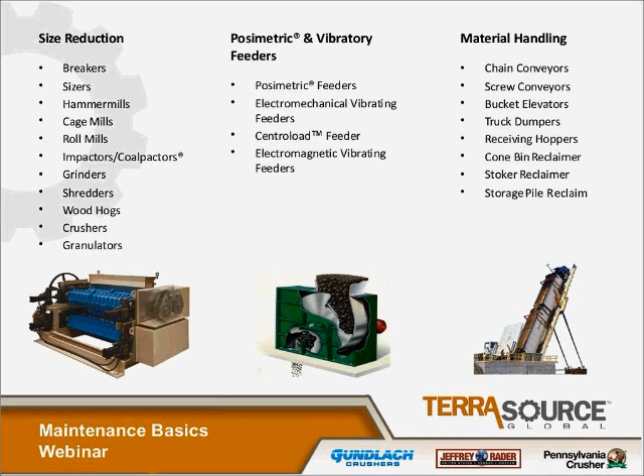The Gundlach crushers, obviously the roll crusher comes in several configurations, 2-roll and 4-roll. Nanosiz-Rs for fine grinding, cage mills, and high tonnage breakers.

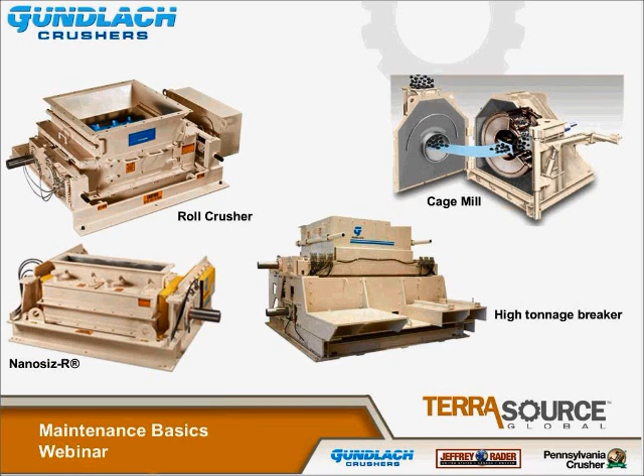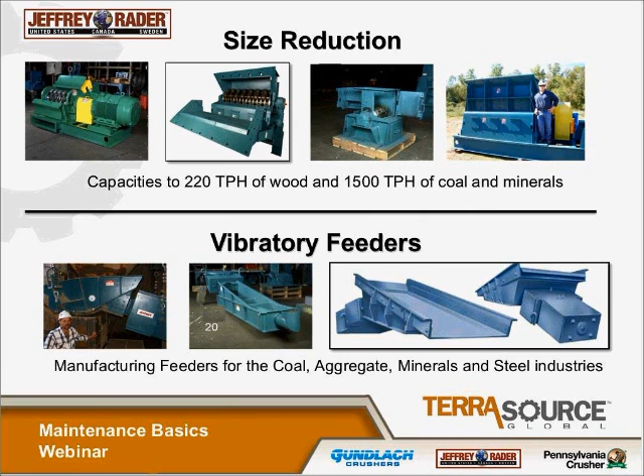The Jeffrey Rader size reduction equipment comes in many models for processing the various materials and industries. Our vibratory feeders are used throughout coal, aggregate, mineral, and steel industries, and other numerous alternate areas.

The Jeffrey Rader pneumatics are a dilute phase type of pneumatic system for conveying biomass, MSW, which is municipal solid waste, RDF, which is refuse-derived fuels, and sludge handling.

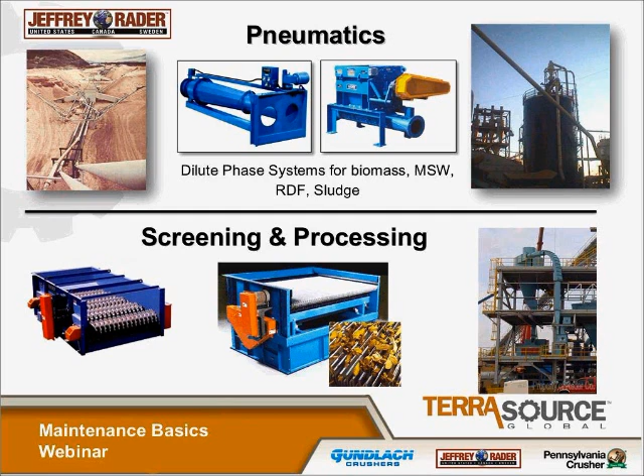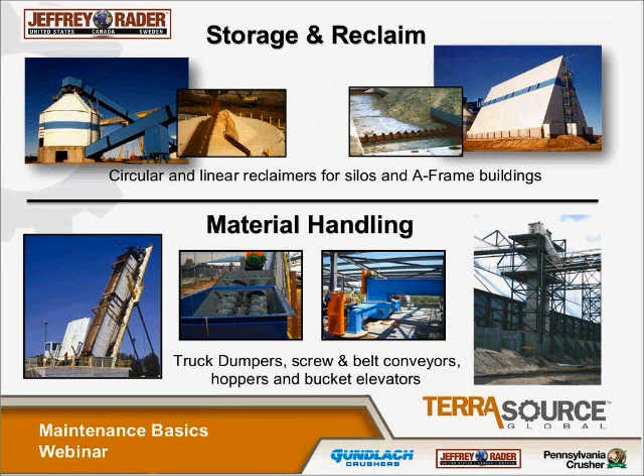Screening and processing lines of equipment for classifying numerous types of products. Storage and reclaim systems, very many numerous designs, and the material handling from truck dumpers to screw and belt conveyors, hoppers, and bucket elevators. So it's a very diverse product line offering.

In the Pennsylvania Crusher line, we have the Mountaineer Sizer that's used mainly at the mine mouths for coal and some of the limestones. We have the Coalpactors for impacting and breaking the coal at the power plants into finer, like quarter-inch sized coals for being fed to the boilers, posimetric feeders, and Bradford breakers.

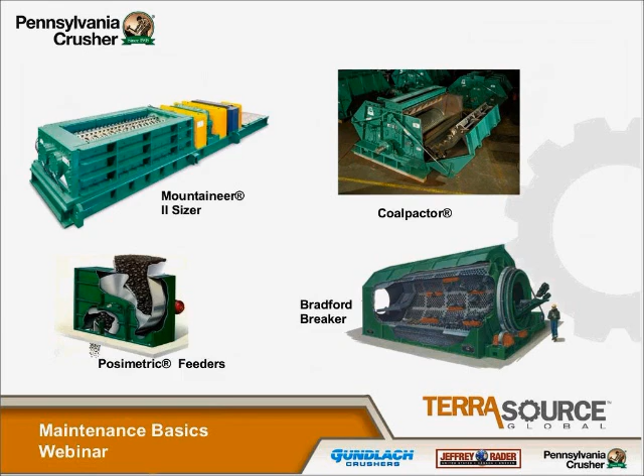These show some of the units. Some of these Pennsylvania Crushers are quite massive, as shown in this single roll crusher. The jaw crusher is a primary crusher used for glass and cullet and limestone and coals. Also the granulators for fine grinding and the reversible impactors.

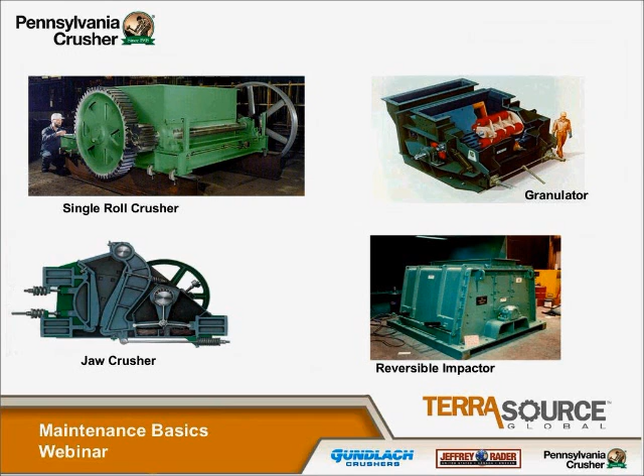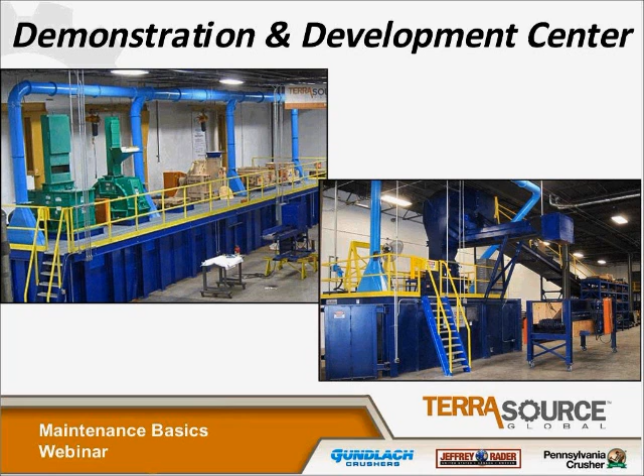TerraSource, to consolidate, we have closed the 3 specific brand labs: the Gundlach Lab in Belleville, the Jeffrey Lab in Woodruff, South Carolina, and the Pennsylvania Crusher Lab in Broomall, PA. We have moved all 3 of those test labs and consolidated into one new, very impressive, large test lab that is located in Duncan, South Carolina. This is just a couple of the shots showing the installation of the various Gundlach, Pennsylvania Crusher, and Jeffrey crushing and conveying equipment. At this point in time, I'm going to turn the presentation over to Matt Brown.

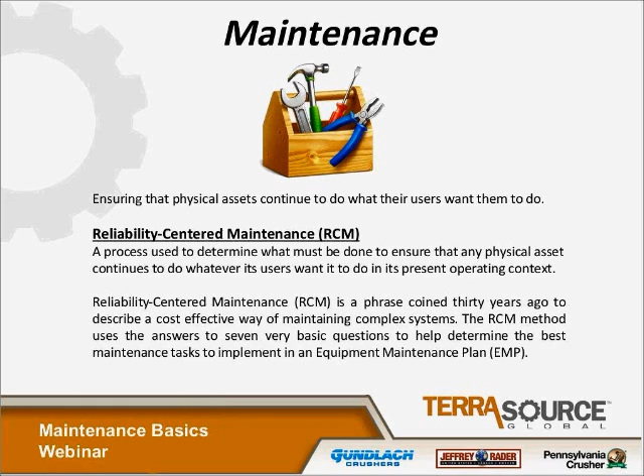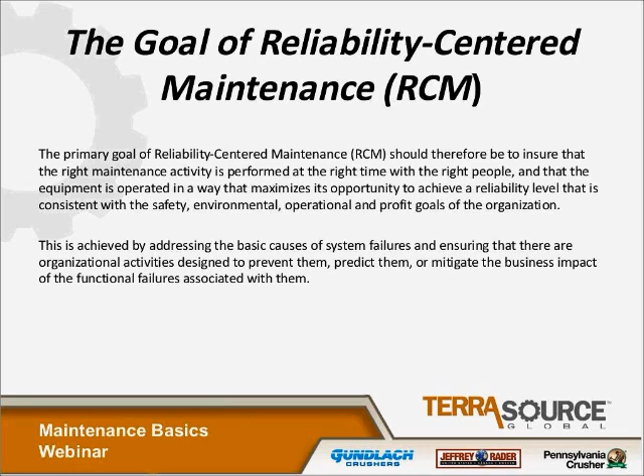Thanks, Keith. The reliability-centered maintenance is the maintenance that was phrased 30 years ago, but it's determined the best maintenance task to implement in your maintenance plan. The goals of the RCM is to ensure that the right maintenance activity is performed at the right time and with the right people. The 7 questions of the RCM are as follows: the functions,

fail to fulfill its functions, what causes the failure, when the failures occur, the consequences, predict of the failure, and the proactive task cannot be found.

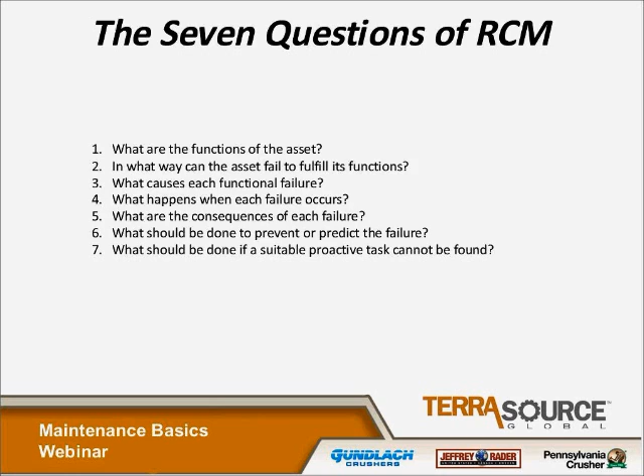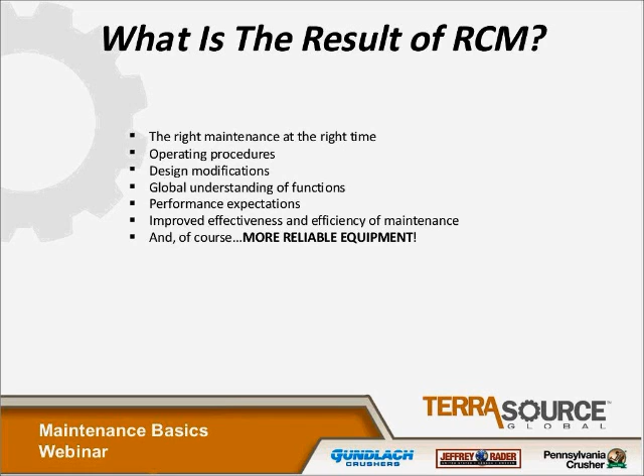Who answers these questions? The RCM team may include the supervisor, planner, craftsman, operator, engineer, manager, or facilitator. What is the result? The right maintenance at the right time, operating procedures, design modifications, expectations, and of course, more reliable equipment. That's the goal of everyone.

Scheduled restoration tasks are when you want to work on your equipment on your own schedule. So if you have an outage coming once or twice a year, you take that time to restore your equipment. It's possible most items survive to that age, and tasks are carried out to restore the original resistance.

Proactive tasks deal with the age of the items, and these tasks are routine items. Default actions are failure finding, redesigning, and run to failure. These are actions that you can't necessarily control.

What is planning and scheduling? Planning is defined as the details of what and how. Scheduling defines the details of when and who, referring to the timing of the work as well as who will complete it.

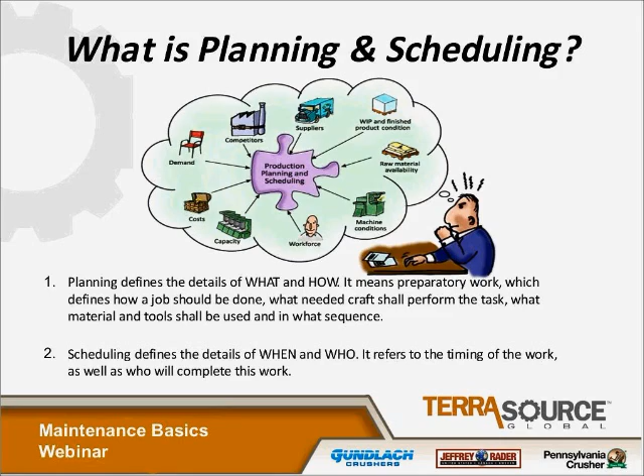Why do planning and scheduling? With planning and scheduling, you can focus on the quality of the task at hand. It's most likely cost effective, and work will be executed in a highly efficient way. There's no scrambling trying to get things put back together. You have a plan, you schedule it, and take care of the maintenance that needs to be done at the appropriate times.

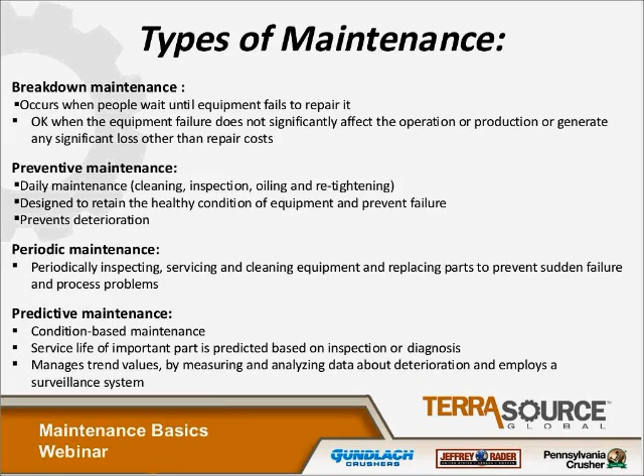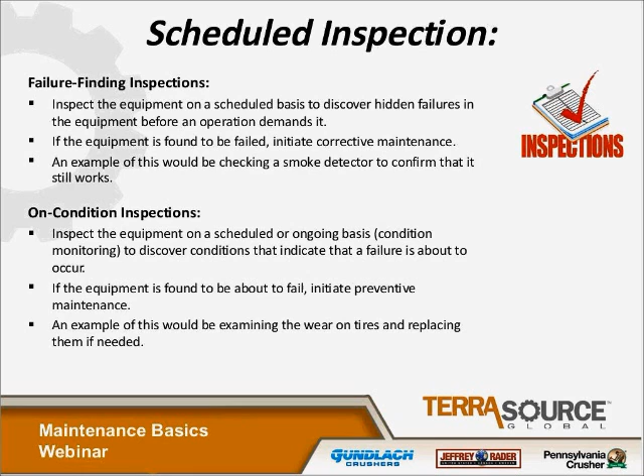The types of maintenance are breakdown maintenance, preventive maintenance, periodic maintenance, and predictive maintenance. Corrective maintenance and maintenance prevention are also included in the types of maintenance. Failure finding inspections and on-condition inspections also help to plan and schedule your equipment for outages and repairs.

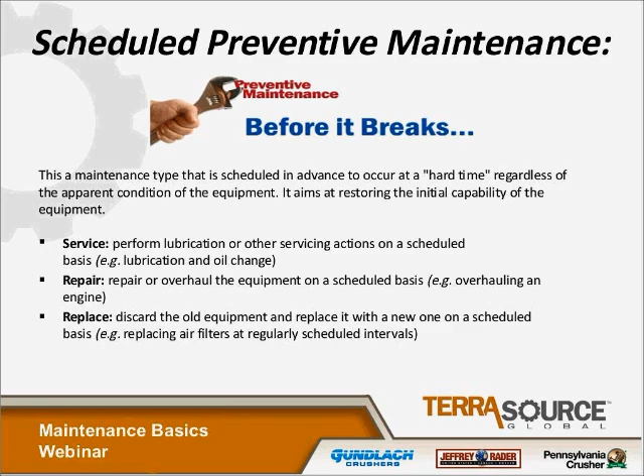Schedule preventive maintenance means taking care of problems before they break. Services may include lubrication on a scheduled basis, repairs on a scheduled basis, or replacing equipment on a scheduled basis. The failure effects: what happens when each failure occurs?

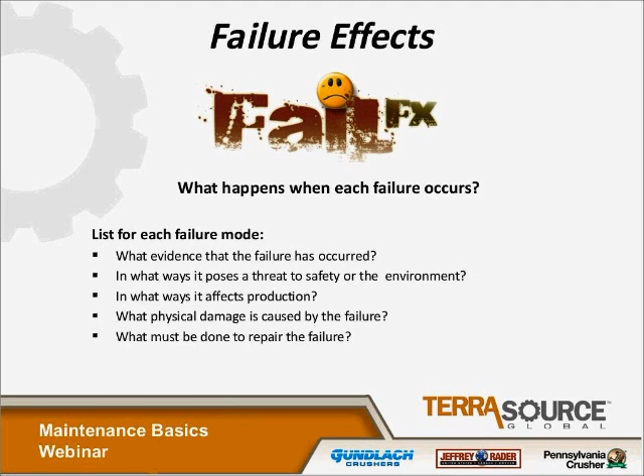When you have a failure, you want to find out why it has taken place. These are a couple things to look for when you run into the failure mode: what evidence shows the failure has occurred, the threat to safety or the environment, how it affects production, physical damage, and what must be done to repair the failure.

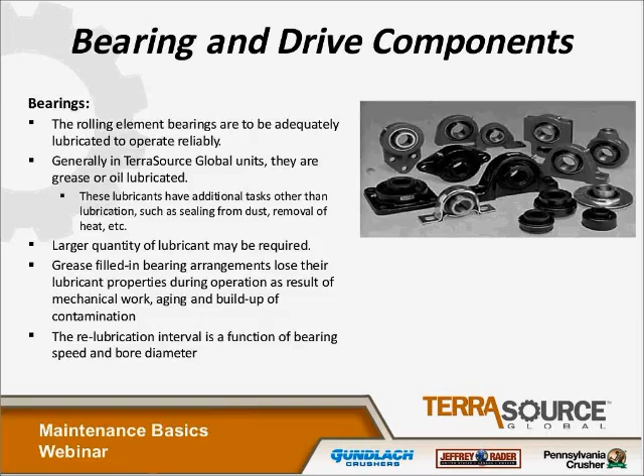Now we're going to talk a little bit about bearing and drive components. In all of our machines, bearings are a big part of the machinery we manufacture. It's important to keep bearings well lubricated, well maintained, inspected, and at the proper lubrication levels. You also want to make sure you're using the correct bearings for the type of machine you're repairing and operating. You want to keep the bearings in very good shape -- these are the heartbeat of a lot of our machines.

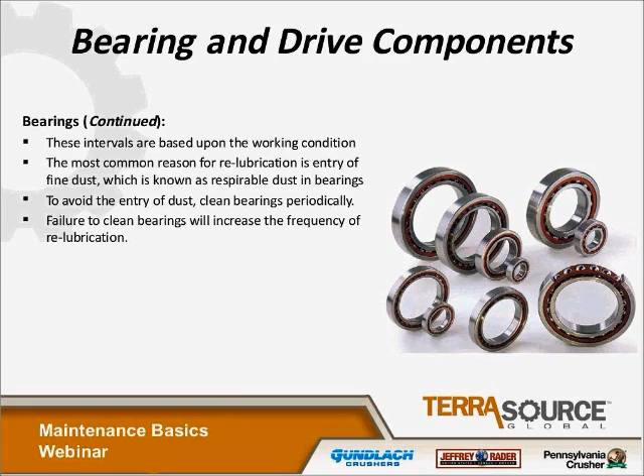You want to avoid the entry of dust and clean the bearings periodically. Failure to do so will create premature bearing failures. Also monitor the vibration when you're checking on your bearings.

There are a lot of systems out right now where you can go in ahead of time -- this falls under preventive maintenance of bearings -- to verify your vibration, whether it be weekly, monthly, or quarterly. Just verify the vibration of bearings, and you should be able to see a pattern if your bearings are beginning to fail or showing excessive wear.

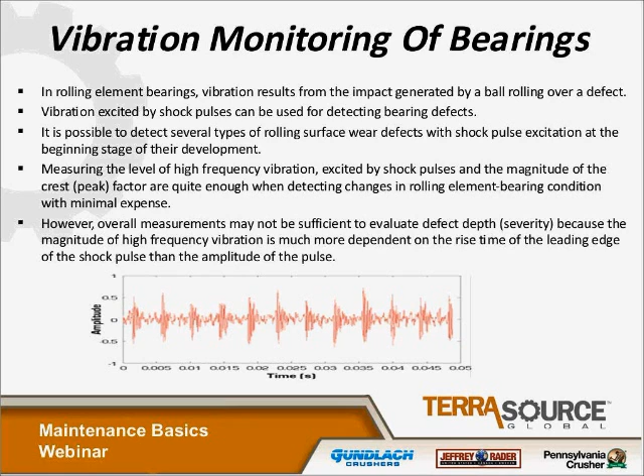You also want to monitor the temperature of your bearings. Normal operating bearings in most of our equipment, across all of our brands, run in an overall range of 140 to 150 Fahrenheit, while bearings in the gear drives operate from 155 to 165 degrees Fahrenheit. These temperatures should be monitored and documented.

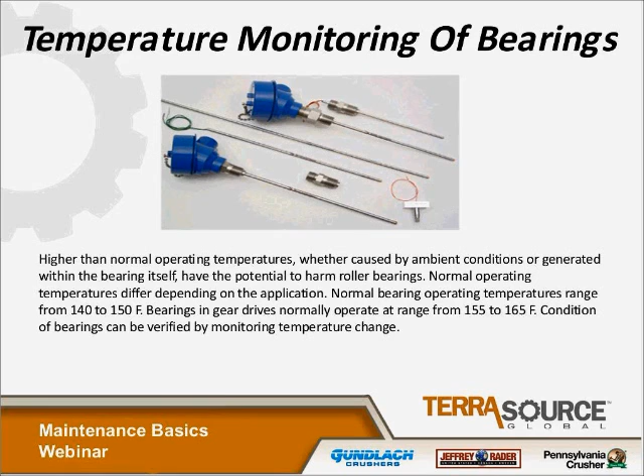We also have gearboxes that operate some of our equipment and drives. Again, these items should be inspected regularly, and the lubrication should be observed to make sure you get the most life out of this equipment.

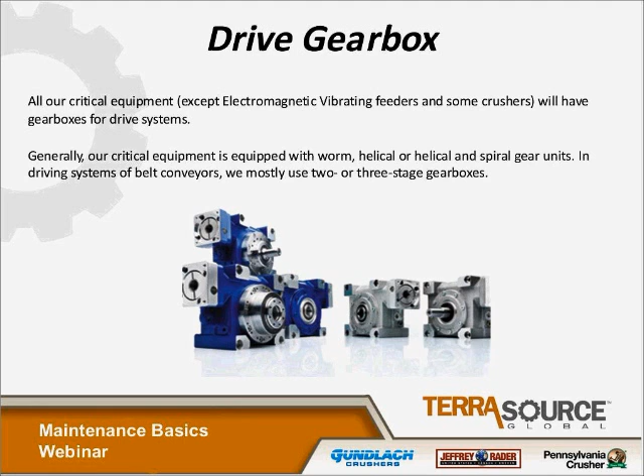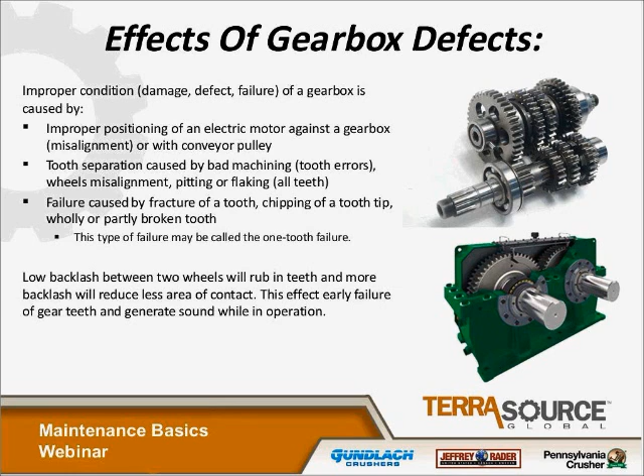Some of the effects of gearbox defects include improper position of the motor against the gearbox, tooth separation caused by bad machining, failure caused by a fracture of a tooth or chipping of a tooth tip, a broken tooth, and more backlash between two wheels which will reduce the area of contact. These are things you need to monitor and verify on a periodic basis.

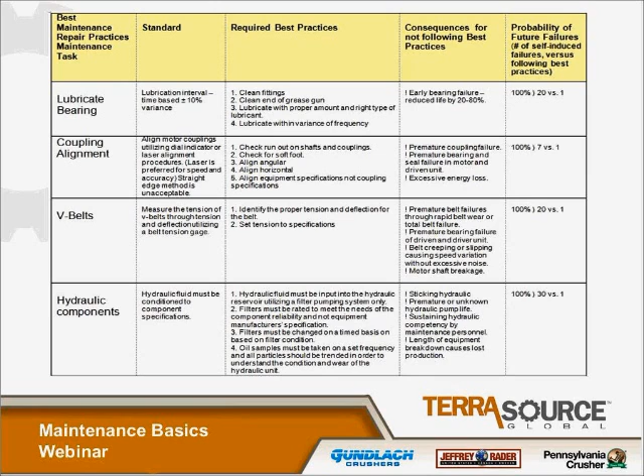Here's a list of some of the items we put together that are used a lot in our equipment: the V-belts, couplings, hydraulic components, bearings. This is something you can look over to verify the standards, the best practices, and the consequences.

Wear parts. With crushing equipment, you have a lot of internal wear parts. These need to be inspected periodically to ensure proper operating conditions within your machinery. If you can't see these parts when the machine's in operation, you may have to shut the machine down, lock it out, open it up safely, and take a look at some of these wear parts inside.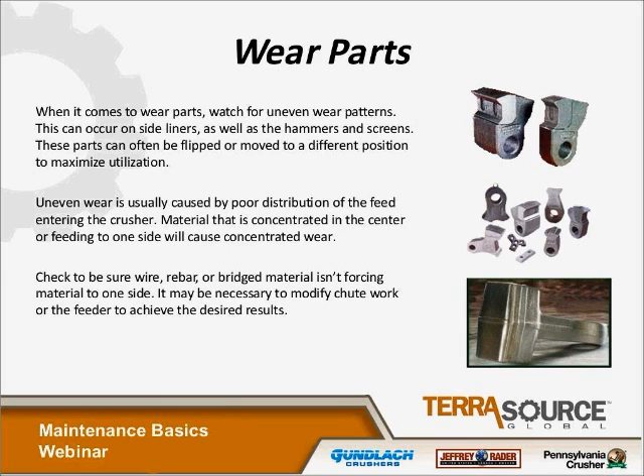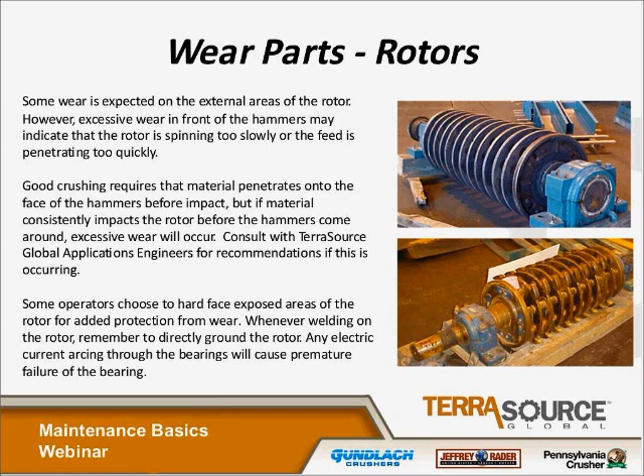These also have to be inspected regularly. Rotors fall into this category. A lot of our machines have rotors with swinging hammers, solid hammers. We have cage mills with cages. You all have rotating devices that may or may not be called rotors, but there's rotating equipment between bearings that also needs periodic inspection.

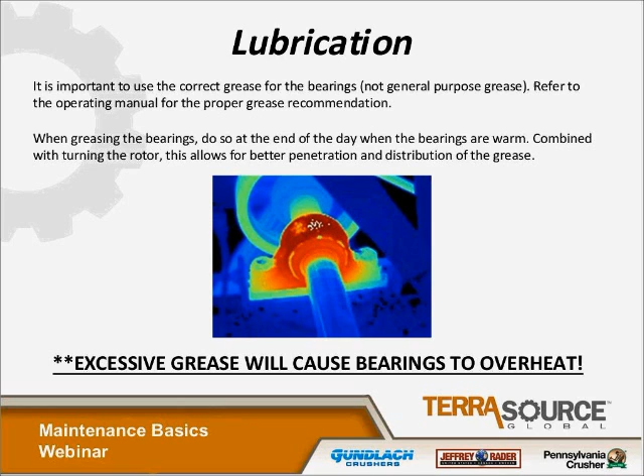Again, talking about lubrication, we have several points of lubrication, whether by grease or by oil. Each brand has its own manuals that provide specifics on lubrication for your equipment, the recommended grading, and the different brands of oils and greases we recommend.

I put together some daily checks for a pre-start. These are daily checks on machinery you have a chance to look at. You want to check the crushing chamber when possible, the clearance between the hammers, side liners, screens, check the cages and screens, check the hammers and screen conditions, check for loose bolts, guards, covers, and if applicable, your hydraulic fluid or oil levels.

These are some daily checks that can be done with our equipment. With equipment startup, these are also some items to follow while your machine's coming up to speed.

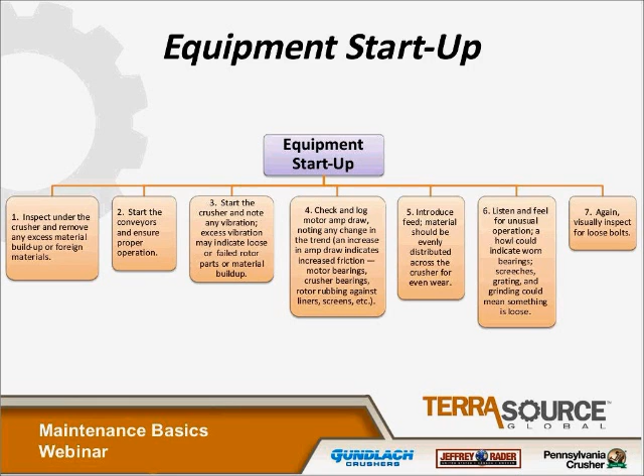You want to inspect the crusher and remove any excess material buildup. Start the conveyors, start the crusher and note any vibration. Check and log the motor amp draw. Introduce the feed to the machine, whether to a feeder or a crusher. Listen and feel for unusual operation, and again, visually inspect for loose hardware.

We also have weekly checks, not as often, but still important items to look at each week. After shutdown, check and log bearing temperatures, hardware, and the seal arrangements. Check the crusher frame for any cracks or repairs. If you're using V-belts, check the tension and condition of those, as well as your hydraulic components.

Then the monthly checks, a little less extensive, but we also want to check for wear in the feed chute, your chains or rock curtains. Check under the crusher for wear, and in the discharge chute.

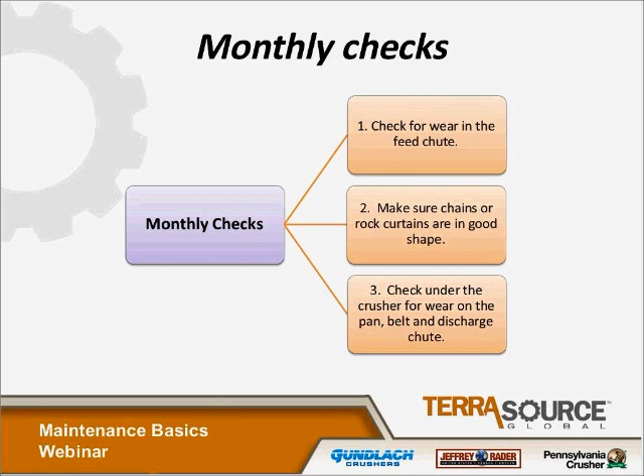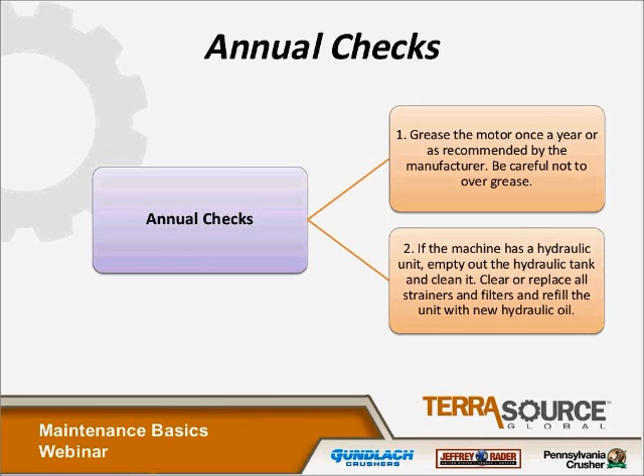And then annual checks: grease the motor once a year as recommended. If the machine has hydraulics, you want to empty your hydraulic tank and clean it, empty the oil and clean it. By doing all of those items, you'll get a lot more life out of the equipment.

Applying this kind of maintenance will help provide for planned shutdowns before you have severe damage. And then the causes of the failures can be analyzed.

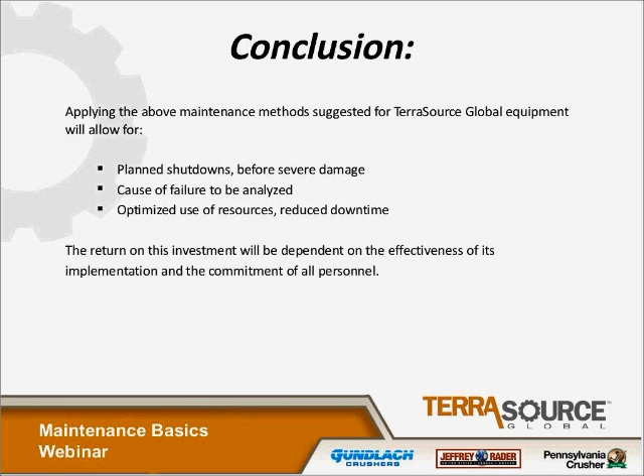What advancements have been made regarding hammer and cage mill material selection, especially as far as erosion and corrosion? Has there been any development to extend the life of crushing rotating components such as hammers and mill cages? He's specifically speaking about the potash industry applications.

Well, we have an answer for that. We're using, in a lot of circumstances, the Jeffrey Ultra Alloy hammers, especially for the wet crushing applications, where the manganese corrodes and erodes. To this point, we have some success with this alloy, using it in these circumstances, and we're always looking to improve.

And we have, as Keith pointed out, the R&D department, which was brand new, and we're always adding new parts and new equipment to the existing machines that we have in our facility, so we can test a lot of these different materials, always looking to improve.

He says pressure continues to rise with maintenance teams to reduce MTBF. What can the industry expect from both Gundlach and Pennsylvania Crusher brands regarding continuous design improvements to the maintainability of their crushing equipment? The hard-faced hammers and screen bars for service crushing PRB is an example of us improving the life and lengthening the periods between maintenance. We do some with hard-facing. The customers have used it, and really appreciate the extra life they get out of those parts.